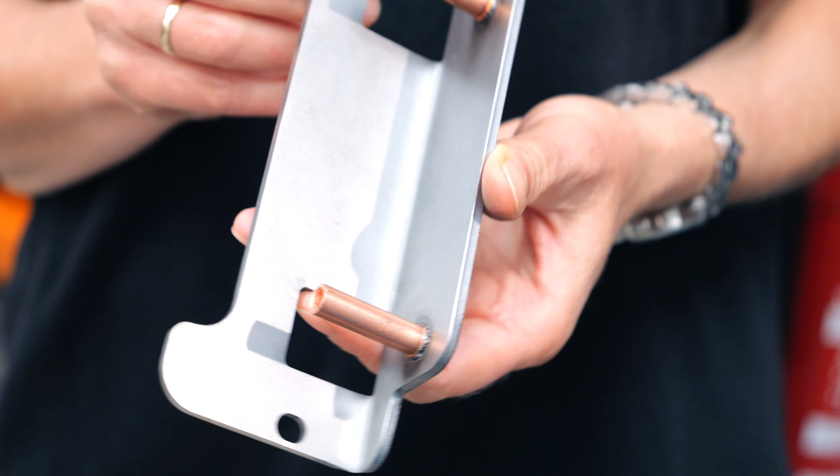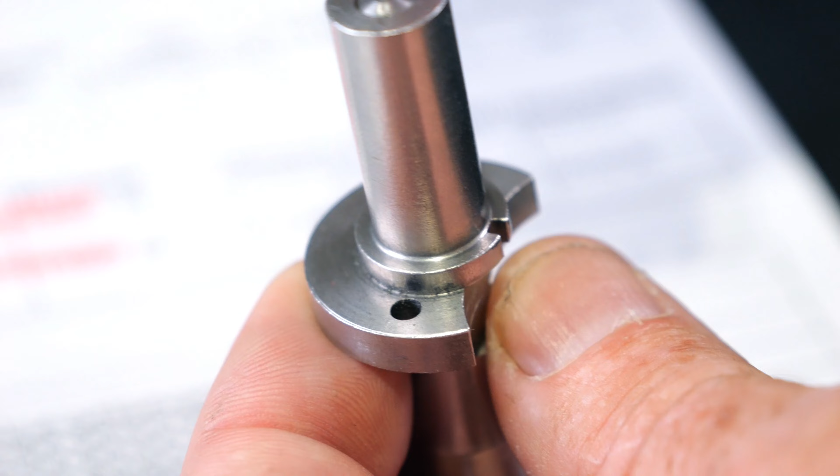In 1997 we bought our first laser machine. It was exciting and the machine was so fast that naturally we also manufacture vendor parts for other companies.

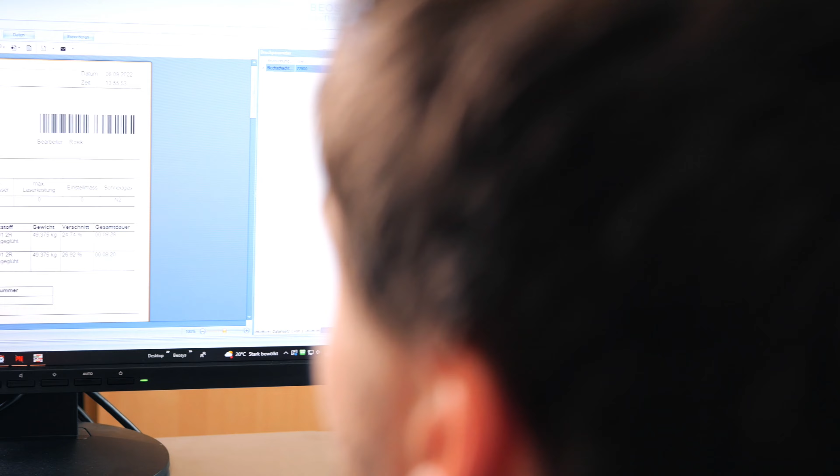Since 2019, we've been thinking about introducing different programming software. In the meantime, we also had another brand here, beside Trumpf machines, also Bystronic. We looked at many different software systems.

And finally, we decided for the WiCAM system in 2020. WiCAM is a manufacturer-independent software. If I decide tomorrow to put a completely different machine here, I can of course do this easily.

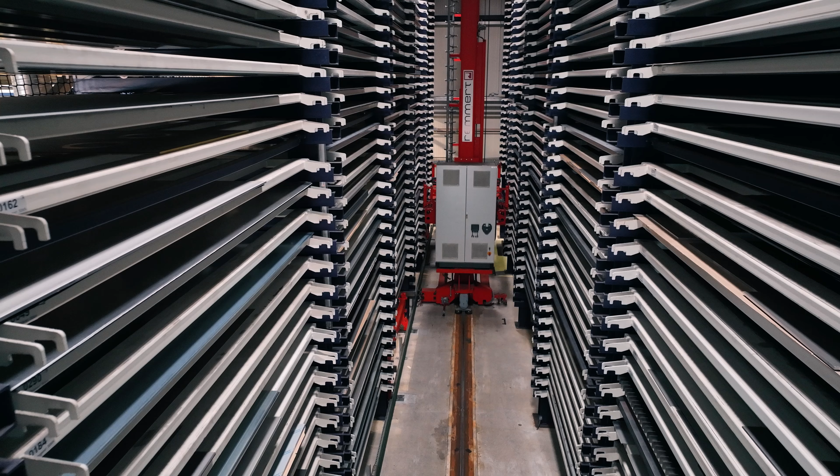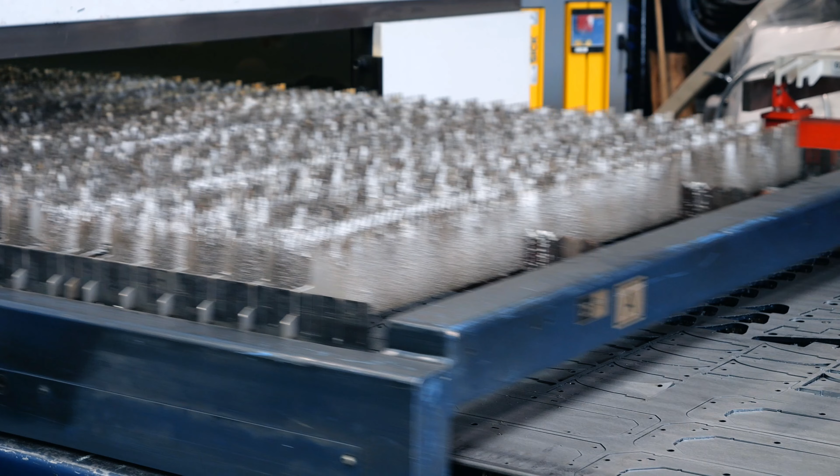We've been working with the ERP system BEOSYS for several years. All orders and articles are created in BEOSYS, and a geo file exists for each article. This file is released when the order is placed and ends up in WiCAM. It's connected to WiCAM via interface.

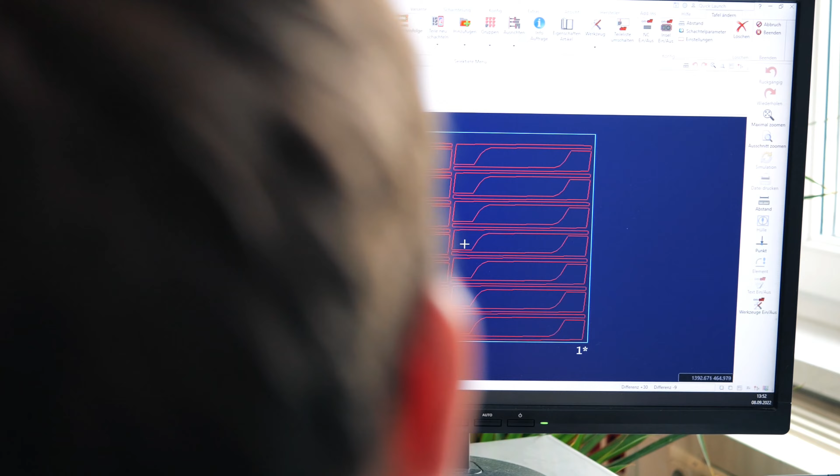WiCAM recognizes immediately existing programs for this order in the appropriate number of pieces. I can select the program and simply give it to the machine by the post-processor run. If the number of pieces has increased or decreased, WiCAM marks it and I can manually adjust the number of pieces with the click of a mouse.

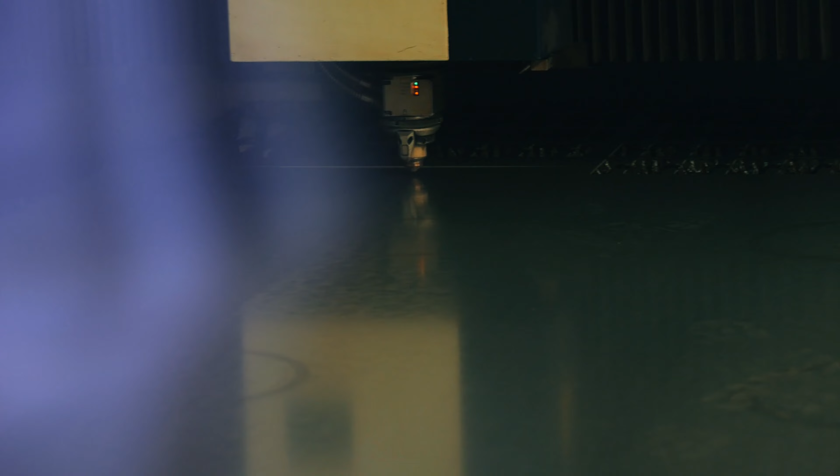The program is created for Trumpf, and immediately I can also pass it on to the Bystronic. Exactly the same job.

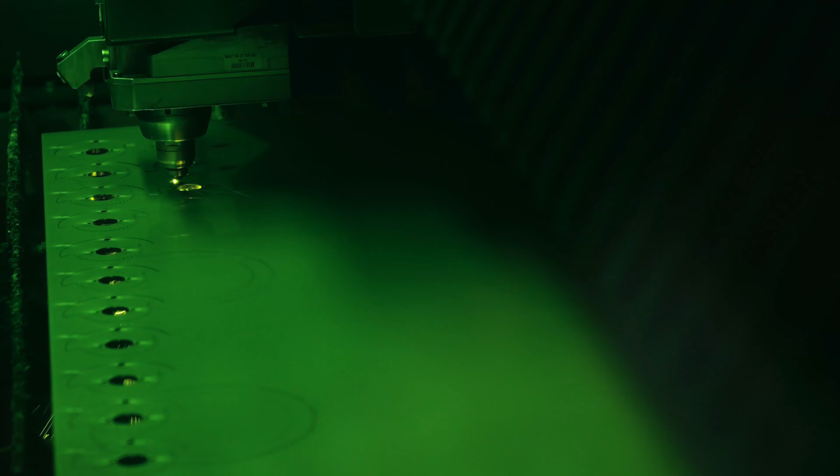As a family business, we naturally do not schedule in months, but in years, and always think about the future. With WiCAM, we do have the flexibility to produce with the machines we just like, or that the market offers well to us tomorrow.